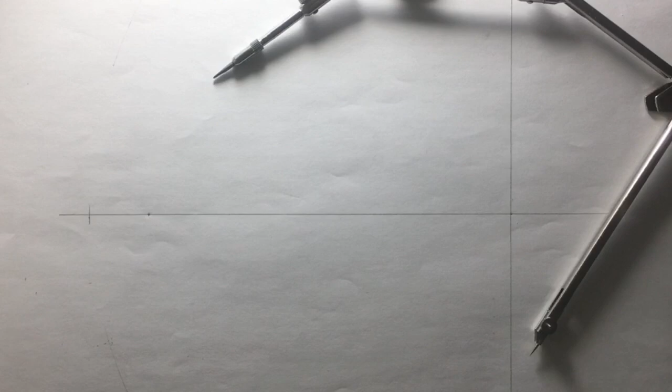Now, accordingly, step number one would be deciding on the length of the arms of the divider. In our case, we are taking 7 inches as the length. This you can see is the 7 inches. We are taking 7 inches as the length.

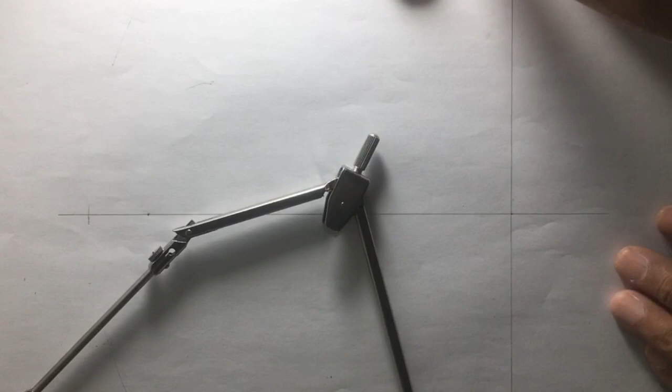So what you do is, first of all, somewhere at the bottom of the page or close to the bottom of the page, you draw a vertical line and a horizontal line. This horizontal line is the bigger arm of the divider, proportional divider. And since we want to keep the ratio of 1:3, our ratio that we want to keep is 1:3, which means that whatever we are observing, it will be reduced by 1/3 or it will be enlarged 3 times, whichever way you are holding the divider.

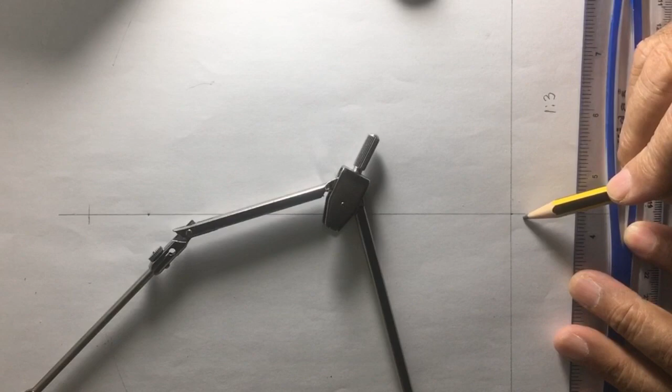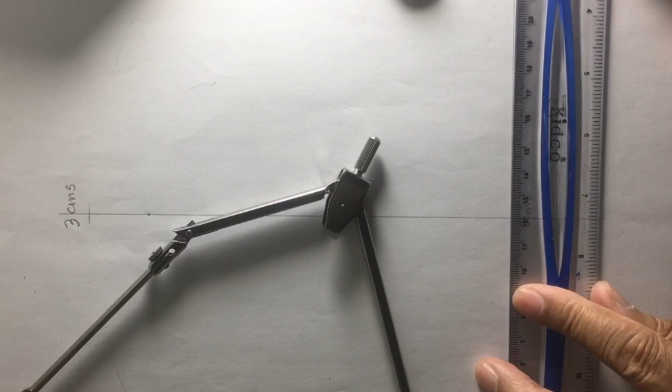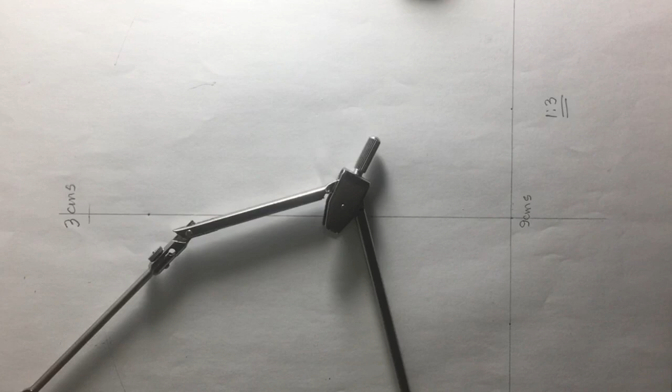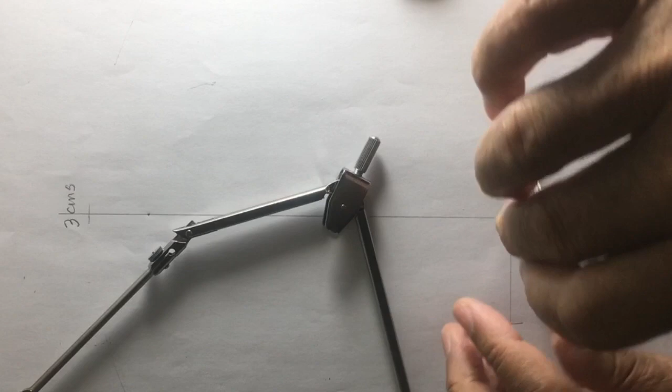So as a first step, we start with measuring, and we say that, okay, we take this 9 centimeter and this will be definitely 3 centimeters because our ratio is 1:3. So 9 centimeter means 4.5 centimeter on each side. One, two, three, four and 4.5 on this side and 1, 2, 3, 4 and 4.5 on this side. So these are the 2 marks here.

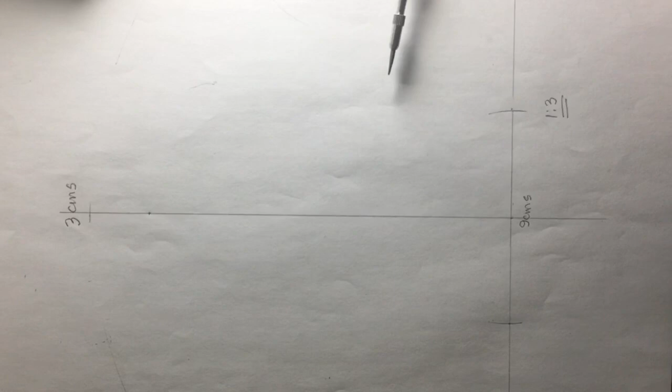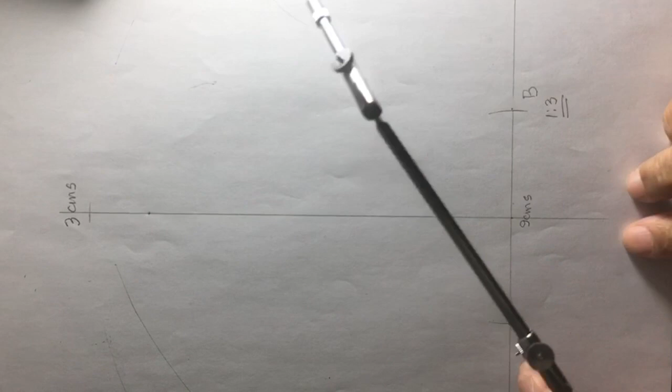And now we said that we are going to have the length as 7 inches. Length is 7 inches. So what you do is, we call this point A, point B, and so on. This we are calling point A, and this we are calling point B. And we are going to draw an arc from this point B, and this is 7 inches, remember. And similarly from point A, we are going to draw an arc, 7 inches distance.

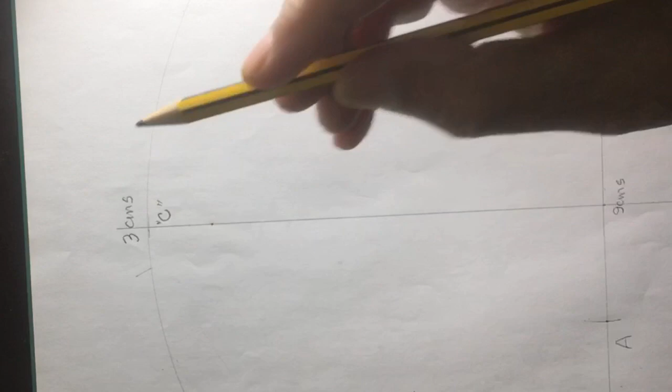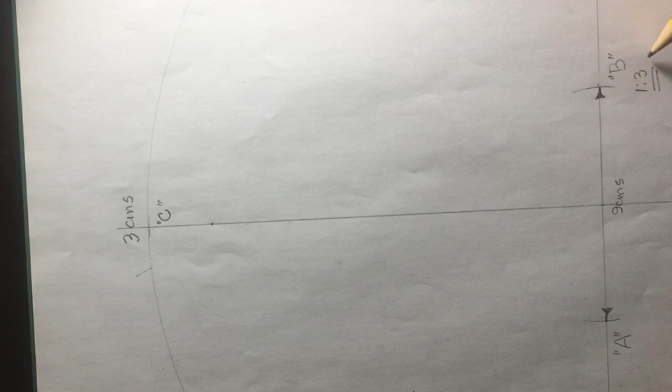We are calling this point C. This was A, this is B, and this one is C. Now, since this is 9 centimeters, if it is 1:3 ratio, then this will be 3 centimeters. So what you have to do is, you have to take 1.5 centimeters on each side.

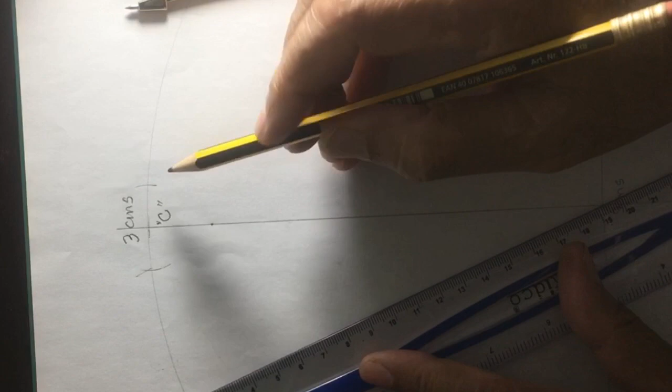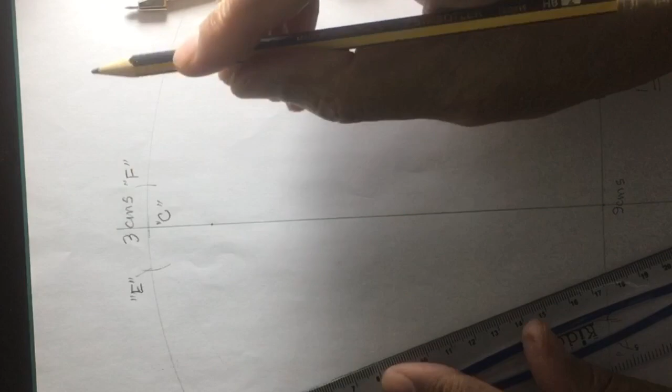So at point C, we cut this line that we had drawn, so that this distance is 1.5, and then we call it E and F. These are the 2 points E and F.

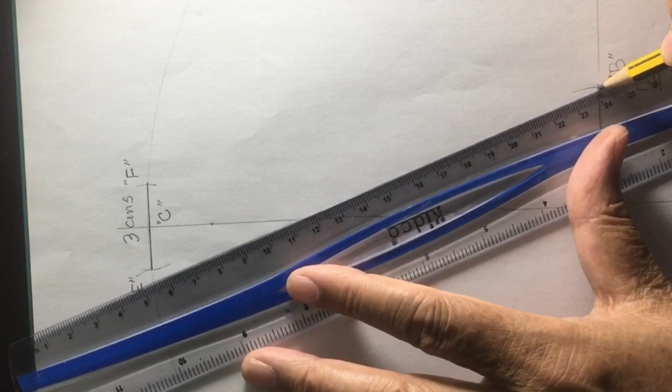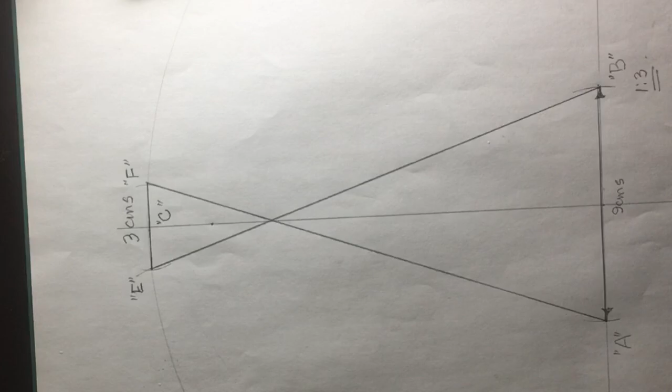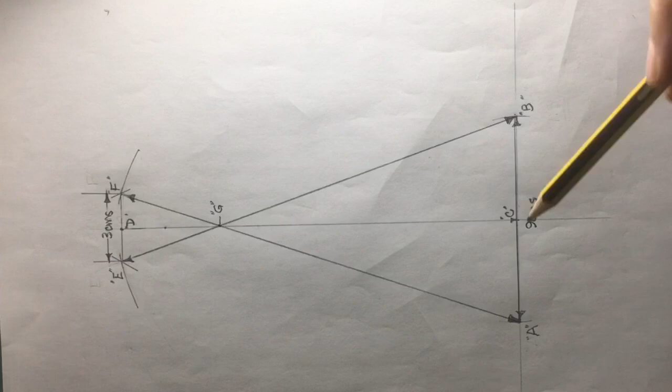Now what you have to do is join B to E and join A to F. This is our proportional divider. So now our proportional divider is ready. As you can see, the wider arm is 9 centimeters and the smaller arm is 3 centimeters.

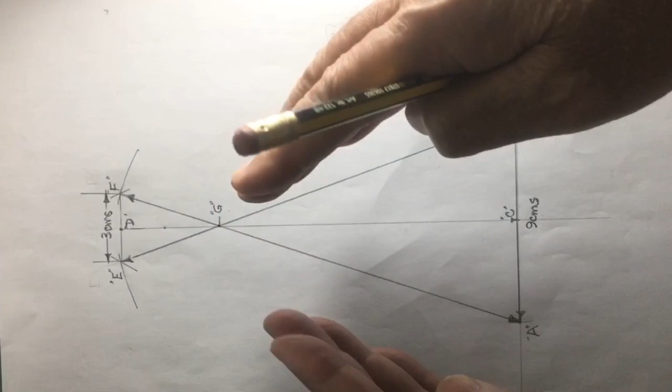And here is the point where you are going to drill a hole and put some nut and bolt arrangement so that you can loosen it. When you are trying to measure, naturally you need to open or close the arms and you need to loosen this accordingly. And when you have set the dimension to whatever you are observing, then at that point you just screw it up so that it holds in place.

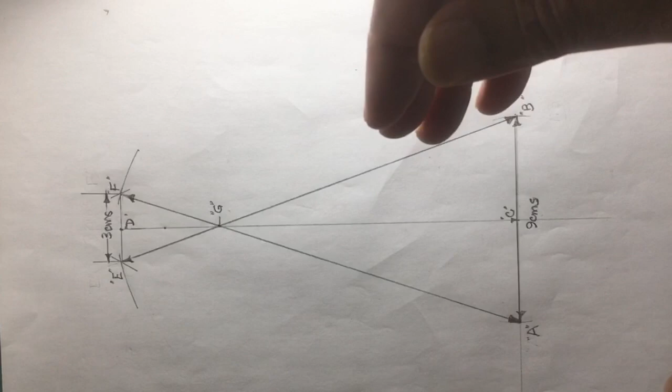But you have to be careful that you handle it very gently. Otherwise, if the dimensions distort, then naturally you are going to get a wrong reading. It's like this. If you are just changing or shifting this, the dimensions are going to vary. So you have to be careful so far as that is concerned.

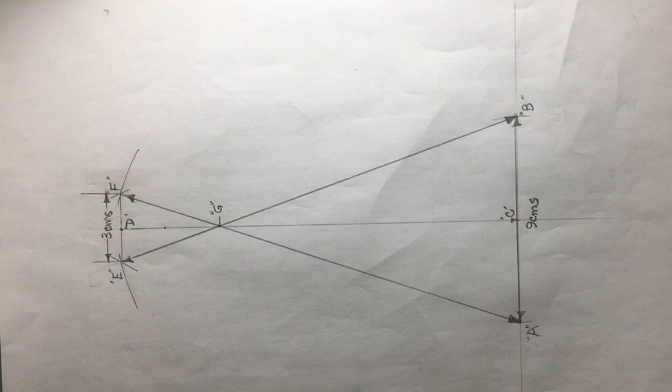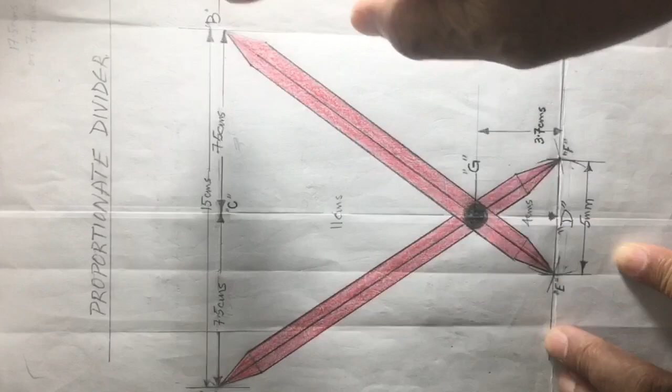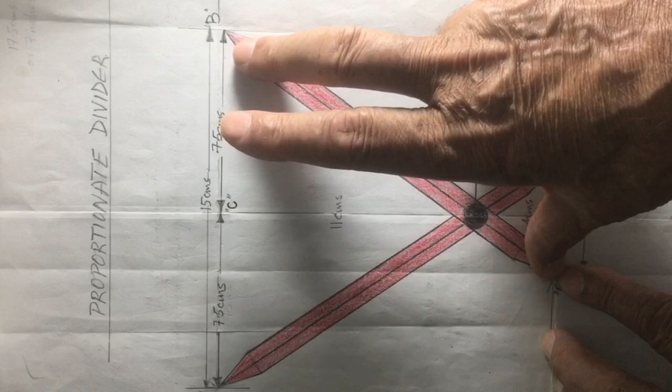Now, what I have done is that I have colored this so that you can understand it even better. There's nothing new in this. First of all, we drew this and then we took a vertical line. This was a horizontal line. This was 15 centimeter wide. And then from this point, you took the compass, measured 7 inch and drew an arc. Similarly, from point B, you took the compass and drew an arc, again 7 inch long. This one is also 7 inch long and this one is also 7 inch long.

And where they bisect, from this point D, you take 2.5 centimeters from here and 2.5 centimeters from here. So where they bisect, you draw a line. And then I have just added this color and the width so you can understand, plus the bolt here. So this is how a proportionate divider is designed. And later on in the next video, we are going to make one and show you how it is done.

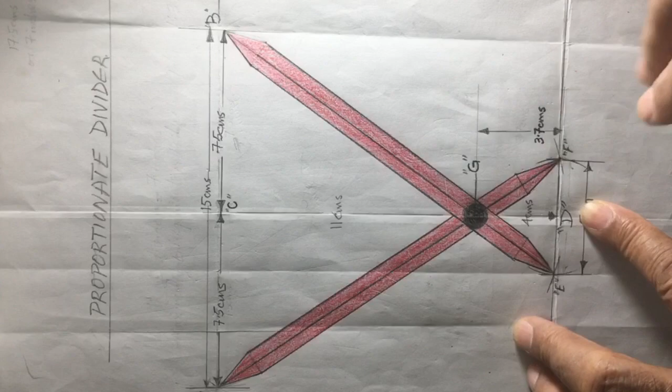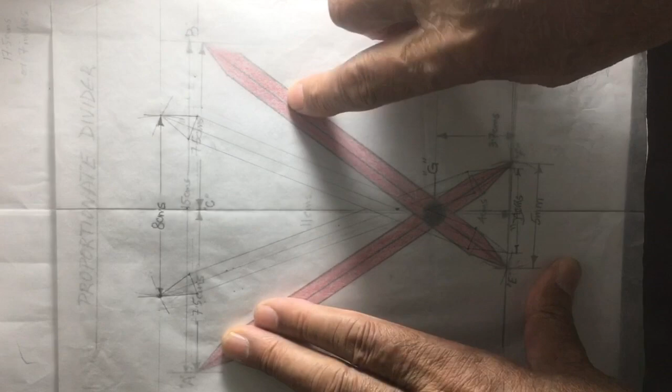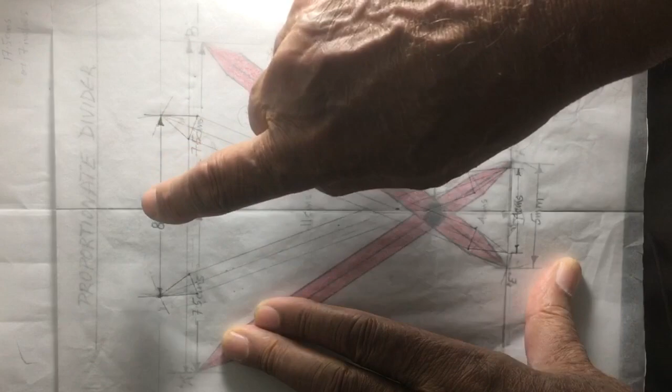For your information, I have developed another design on this butter paper, but the ratio I have changed. This is just to explain how the ratio can be changed. So you can see that this one is here and the red one at the back is what we designed, which was based on 1:3 ratio. This one has its legs 4 centimeters apart, but the bigger legs are 8 centimeters apart. So this is like enlarging the dimension from 4 centimeter to 8 centimeter, or from this angle, reducing from 8 centimeter to 4 centimeter. So the ratio is 1:2.

However, the length I have kept the same. And you can see that if you remove this bolt, there are a couple of holes on both the legs. So if you change the location of the bolt from this hole to this hole, then the ratio changes, as you can see, and is now doubling the image instead of tripling the image, which was the red one we designed earlier. But if you design based on 1:2 ratio, then your point will be here, and you have to remove this screw, place it in this hole, and tighten this again.

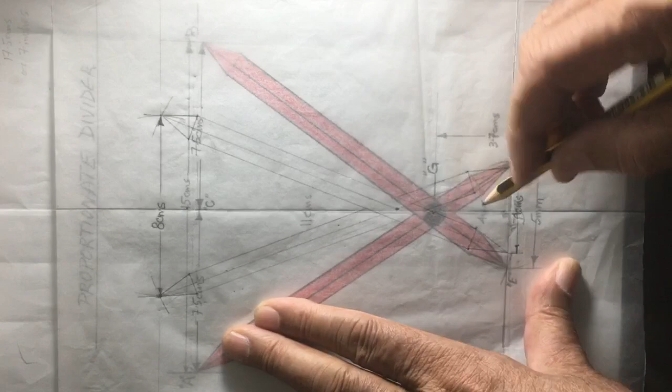So now whatever dimensions you take, if it is 8 centimeter here, it will become 4 centimeter. If it is 10 centimeter, it will become 5 centimeter. Similarly, if it is 2 centimeter here, it will become 4 centimeter. So this is 1:2 scale.